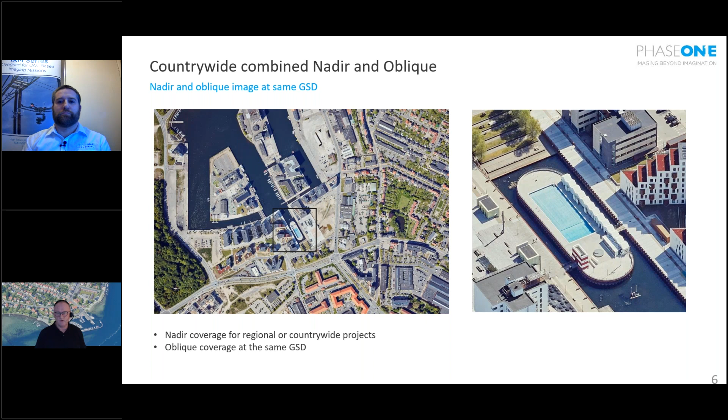At the same flight, we can go into details and get the high resolution. This example is from the full coverage of Denmark. All 45,000 square kilometers is covered with a 10 centimeter resolution, both in nadir and oblique. And we see it in several countries in Europe. It's coming, and we are sure that there will come more of this.

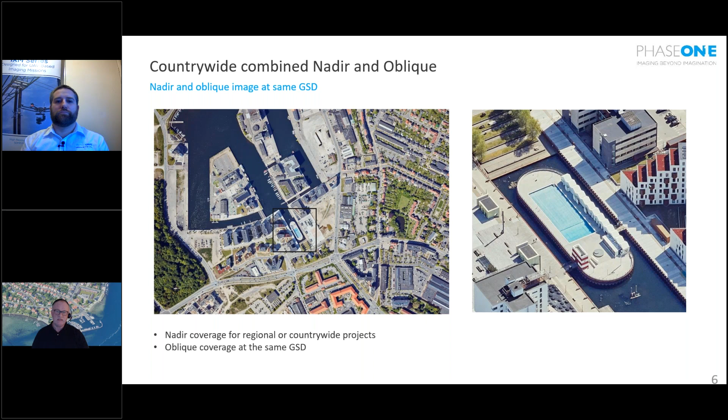So you can call it a kind of add-on for large-scale mapping, but it's not only giving advantages in the resolution. We also believe that it really can bring new dimensions to automatic mapping and feature extraction, because you simply can see all objects from all sides.

3D city models are coming. Smart city is running. Smart city has a high demand for having a kind of model where you can store all your information. They want a CAD, they want a GIS platform, and they have a high need for details.

And for this, we saw a demand to be able to fly 5 centimeter GSD. We also saw a need that it was possible to do it with any normal survey aircraft, not only flying dangerously slow, but also from a fair altitude. So with this, we really think we have made a system flexible for flying and doing this very difficult survey when we are competing with large airports around the city or in the city areas.

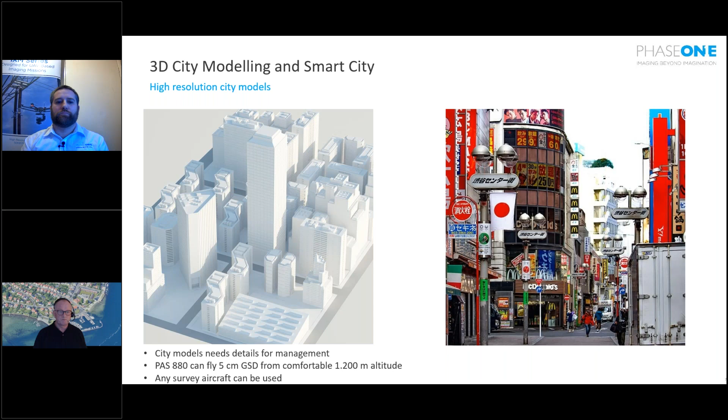Okay, so there's also a need for corridor mapping. Corridor mapping is something coming up because by photogrammetry, and this type of mapping can match the accuracy you normally have in a construction work. Typically we can now deliver the accuracy you can get by an RTK GPS. So we can fly 2.5 centimeter pixels, and with this we can support high accurate mapping projects for all kinds of corridors, whether it's supply or whatever it is.

And of course, you could do it over cities, but we mainly see the demand here. And there we can deliver this impressively. You'll get some examples at the end of the presentation.

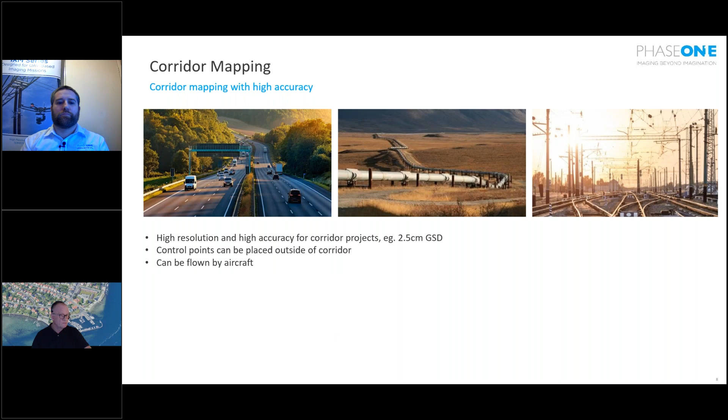And James will tell a little bit about the idea that we can check the quality online when we're flying, because fast delivery is often a key for this type of project.

Okay, so let's go to a presentation of the system, and I just need to click here.

Every day, the world is evolving. As new cities and communities are built, there's a need for advanced planning with accurate geospatial data. To answer this growing demand, Phase One introduces the PAS 880 oblique and nadir system, the new 880 megapixel large format oblique system for high resolution geospatial missions and 3D models.

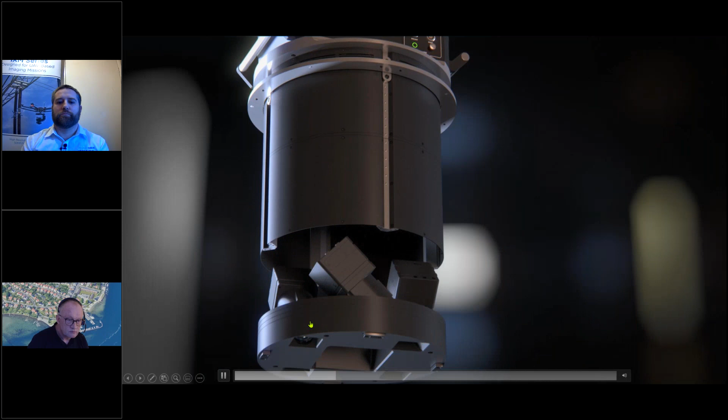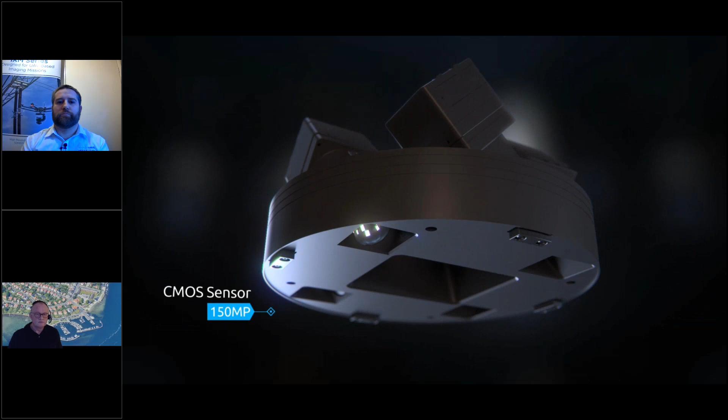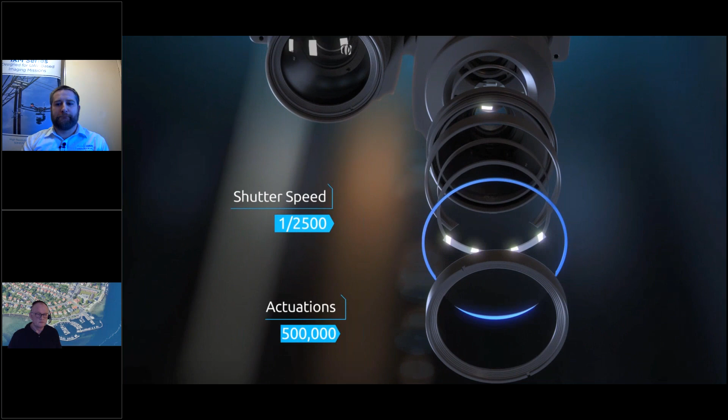The solution's flexibility enables dual configuration for collecting 3D oblique and 2D imaging. The PAS 880 is based on the established technology of 150 megapixel and 280 megapixel cameras, which comprises the backside illuminated CMOS sensor for perfect image quality. The lens's integrated RS shutter, with its long-proven reliability and high speed, delivers record-breaking actuation capacity. The unbeatable performance of the capture rate contributes to the highest accuracy and quality for effective 3D modeling projects.

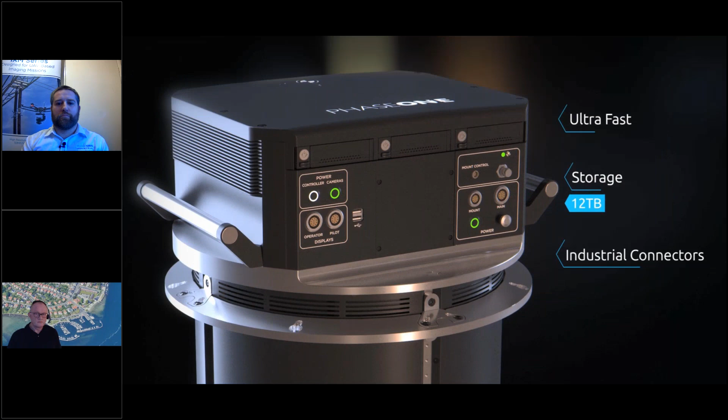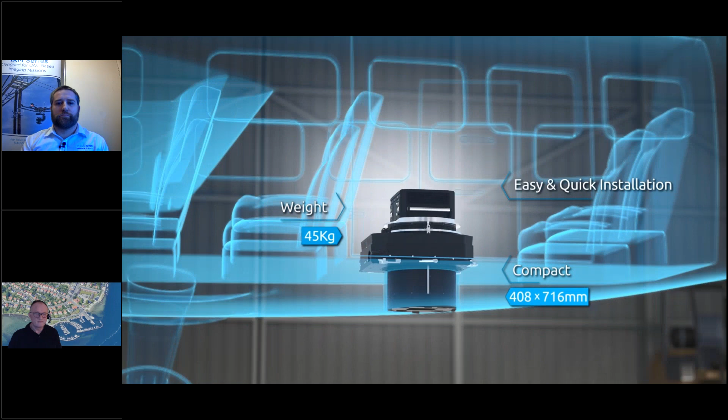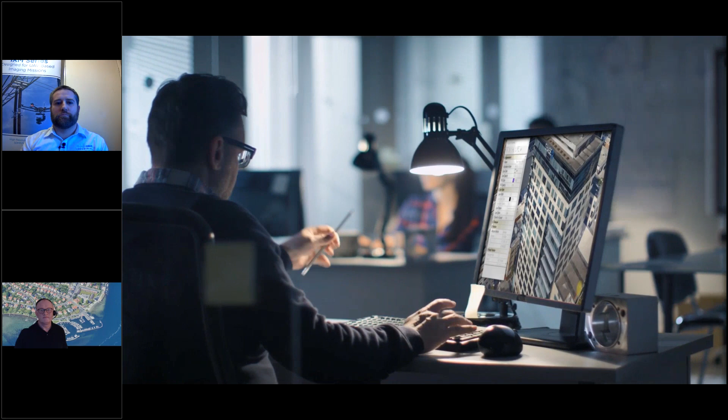Ultra-fast writing capability and large storage capacity is provided by the control unit. Thanks to its sleek design and adjustable plate, the PAS 880 is installed in minutes and fits most aircraft. With the new generation Phase One software, flight planning, data collection, and image processing are easy and efficient. Phase One designed an open system, allowing freedom to work with any leading post-processing software. The PAS 880 is developed with uncompromised quality and the best ROI for 3D and 2D imaging missions.

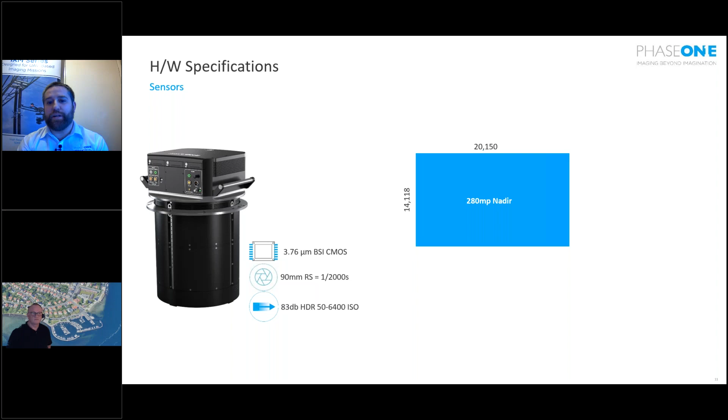For the obliques, the system is equipped with 4x 150 megapixel oblique cameras. These are all installed with landscape orientation, which gives you much better efficiency, especially in your planning for the side overlap part of the planning process. Again, the cameras use the Sony backside illuminated CMOS sensor with 3.76 micron pixel pitch. They have the 150mm RS lens, supporting exposure speeds of up to 1/2500 of a second, and again the same high dynamic range, 83 dB, supporting an ISO range of 50 to 6400.

Quite importantly, as pointed out earlier by Paul, the nadir to oblique ratio of the PAS 880 is 1 to 1.18. This is important because the closer you are to a nadir to oblique ratio of 1 to 1, the more flexible you are for planning, especially in mountainous or hilly terrain, where the GSDs are quite critical in terms of your planning for the overlaps.

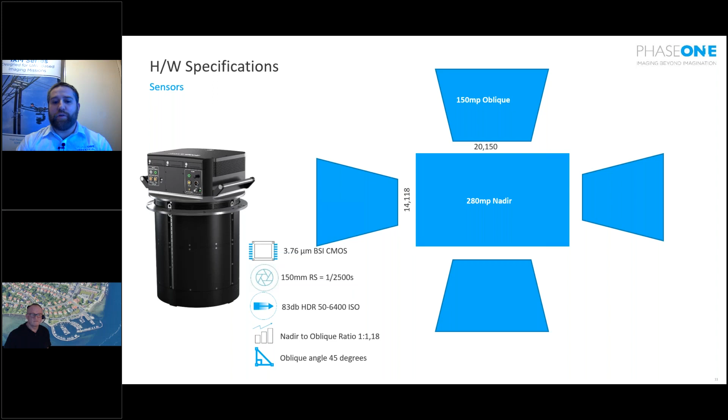The oblique angle of the system is 45-degree mounting angles for all oblique cameras. The cameras themselves are mounted in landscape orientation, so the cross-track resolution is the widest across the field of view. This supports your planning for efficiency in terms of side overlap coverage, meaning you're more efficient. The 150 megapixel cameras enjoy a cross-track resolution of 14,204 pixels, and in the along track direction, the cameras enjoy 10,652 pixels.

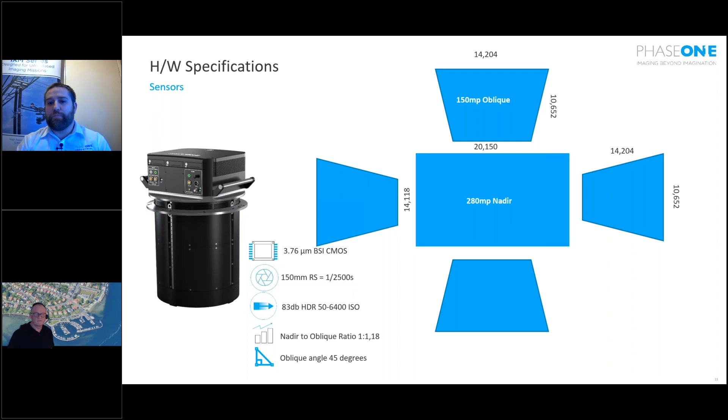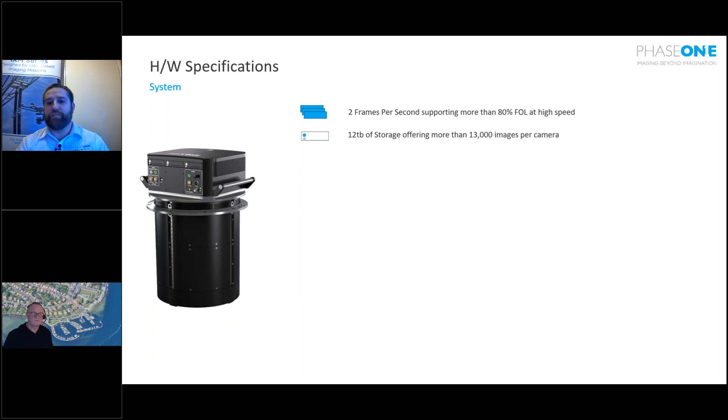So looking at more detailed system specifications: first off, as Paul mentioned, it's a high performance system, the highest performance in its class. It supports 2 frames per second, allowing more than 80% forward overlap at high speeds. The camera has more than 12 terabytes of storage, offering more than 13,000 images per camera, which allows much higher data collections per flight mission.

The system is integrated with the Applanix GNSS IMU solutions, and can be configured with either the AP+50 or AP+60 GNSS IMUs. The system has a lightweight and compact design. There's more information on weight in a further slide, but the system is only 45 kilograms, which, as a large format combined oblique system, makes the PAS 880 the lightest system available in its class.

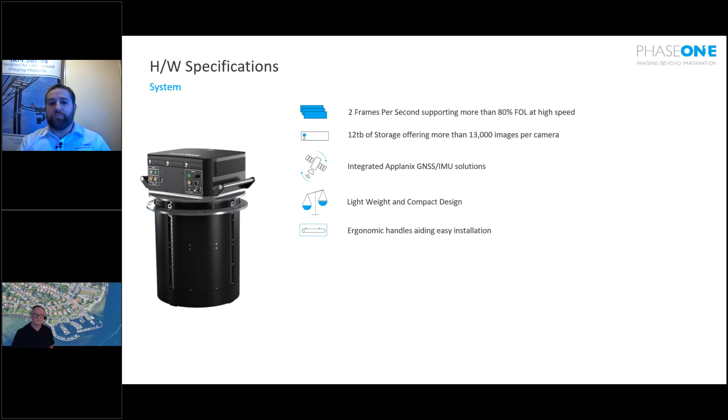It has ergonomic handles, which aid easy installation of the system into the aircraft. More information follows in a coming slide, but the main message here is that 2 people can install this into the aircraft in under 1 hour.

Coming with the next generation Phase One software package, it enables simplified flight planning, operation, and processing workflows with more advanced user interfaces and more streamlined workflows.

Power consumption is 380 watts on average, with 450 watts measured as peak power consumption.

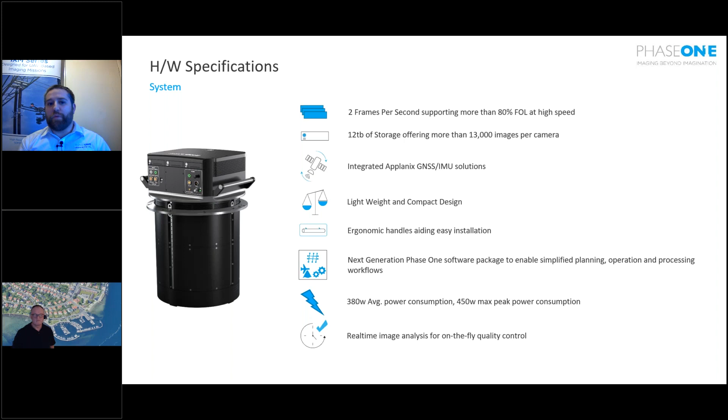On board, we also have real-time image analysis for on-the-fly quality control. So all images coming in can be analyzed in real time by the operator, which means he can make more detailed notes in his flight log, so that by the time the data reaches the processing staff, they're already aware of any artifacts, maybe cloud shadow or anything else significant in the imagery which might require a reflight.

So, forward motion compensation: we derived this by utilizing the benefits of the Phase One technology. Utilizing the high dynamic range on the sensor, along with the short durations offered by our RS shutter, allows us to minimize the motion received by the sensor. With the high dynamic range, it really allows us to increase the usage of ISO without introducing any extra noise or degradation to the quality of the image, whilst maintaining the actual physical blur received by the sensor.

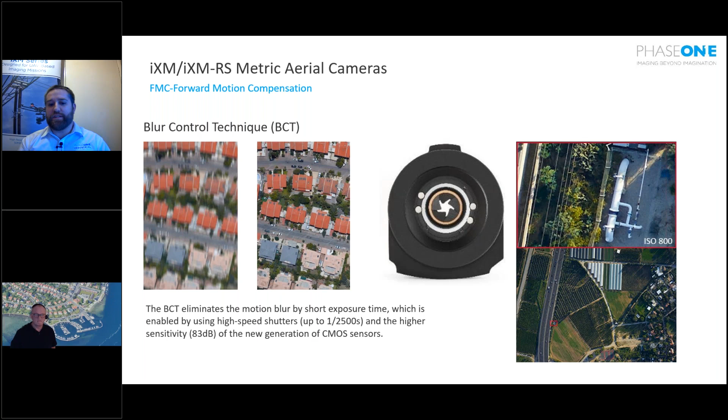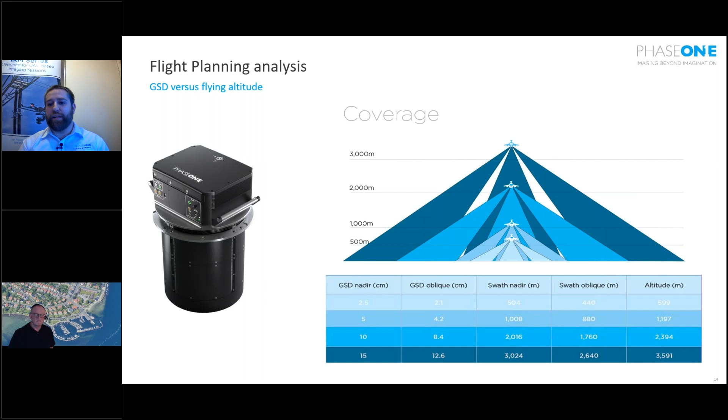As mentioned previously, power requirements are 380 watts on average and 450 watts max peak consumption, which really means you can install this in a wide variety of aircraft without worrying about the amount of power required. Everything is included inside the actual sensor head itself, so all that's required is one single power outlet from the aircraft and everything's covered.

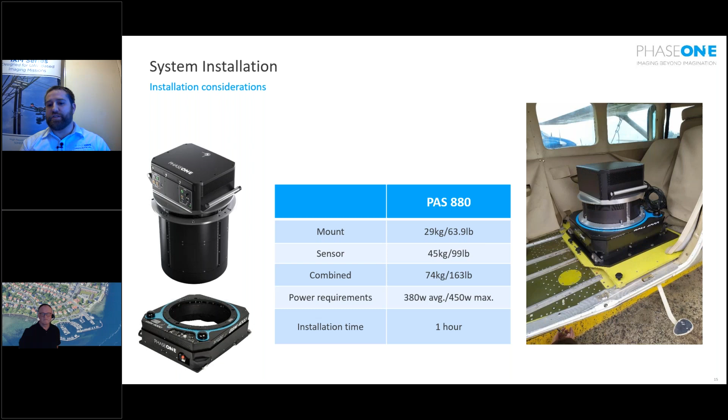With regards to installation time, if the aircraft is ready for installation, meaning the base plate and GNSS antenna are already mounted, it can take 2 people less than 1 hour to install this system. It's very flexible in case you have to quickly remove the system and install it into another aircraft for a maintenance reason. It's a straightforward and simplified installation process.

Just having a quick look over the software solution. So as the software currently stands, we have iX Plan, iX Flight, and iX Capture.

IX Plan enables the fast import of various file types, such as digital terrain models, DTMs from direct download from SRTM, GeoTIFF import, XYZ import, base maps, and area of interest, supporting all common formats like DXF, shape, KML, DWG. It allows you to quickly modify and update project shapes, and import ground control points for detailed planning.

On top of the flight planning, we also have various reporting tools. We can report on project parameters, and we can look at various quality control tools to ensure that the planning is really conducted to the standards required by the client.

In the aircraft, we have, first of all, the iX Flight. The iX Flight software enables the planning and execution of the flight, the positioning, sensor management and triggering.

It also collects in the background log files, which can be used to enable more detailed processing, flight reports, and greater mission analysis. On top of this, the system is delivered already with two displays: a 7-inch display which can be mounted to the yoke of the aircraft for the pilot, and a 20-inch display for the operator, giving the operator the largest display to really view each image in great detail and make sure that the details collected are to customer specification.

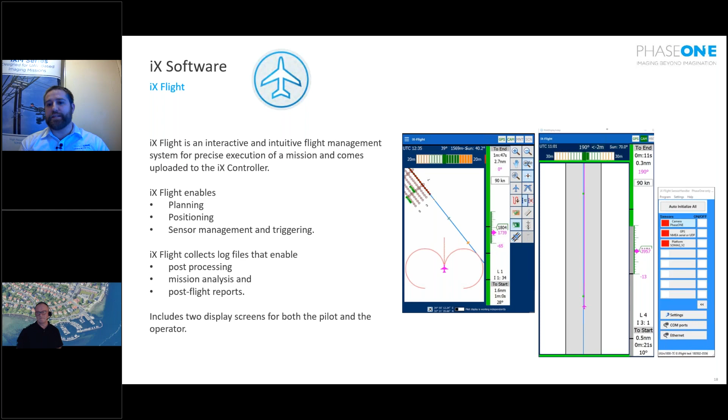Currently, alongside the iX Flight, we also have the iX Capture software. The iX Capture is the camera control software, which is really where the operator is able to fine-tune the camera settings to ensure optimal image quality.

This is done through histogram feedback, which is received for each individual image, along with the EV exposure balance. So you can really see image by image that the settings applied to the camera are the settings required to generate the best image quality possible.

On top of this, whenever you need to change an image exposure setting or aperture value, this is applied immediately to the very next flight frame in the sequence. There is no delay in the update of the settings. It has happened, so you can respond very quickly to changing conditions and adapt the system accordingly.

As well as being used for image capture, this software is also used back in the office for post-processing. Taking that image data along with the calibration information from the calibration report, you can convert the raw file quickly and easily to a distortion-free calibrated TIFF, which is then ready for your follow-on post-processing solution.

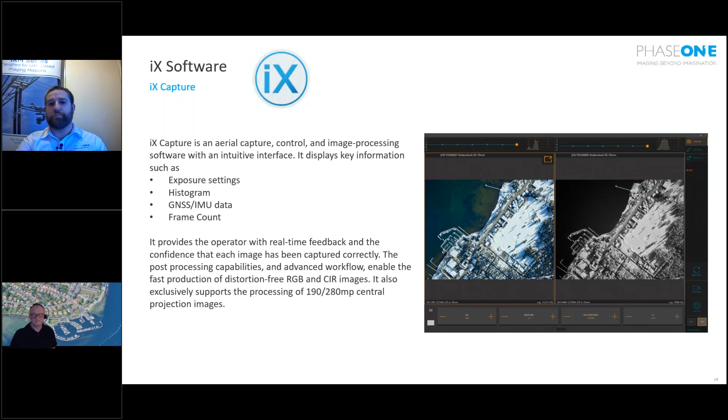So a quick look to the future. In development currently is the iX Suite package, which includes updated iX Plan, updated iX Flight Pro, and also iX Process. First of all, looking at iX Plan.

It's based on the existing application. It brings forward the addition of oblique-specific planning, the ability to input oblique system information, and therefore plan the oblique mission. The long-term plan is to remove the current area limitation and also change the software so that instead of just creating individual flight plans, you're now creating projects, including missions, making project management much more streamlined and user-friendly. That will be done through an advanced user interface.

We then have the iX Flight Pro. This is a new product. It combines into one single software solution the flight management and the camera management into one product. It will be done through an advanced pilot display with the addition of symbols and functionality, as well as an advanced operator GUI.

It will allow the operator in real time to physically monitor each image coming in. They can go back and review an image, giving the operator the ability to really do quality control in flight. Utilizing those periods between flight projects, or on the flight back to the base of operations, gives the operator the chance to go back through some of the images and make notes in his flight log, so that during the delivery of the data back to the office, that can also be combined with the post-flight reports.

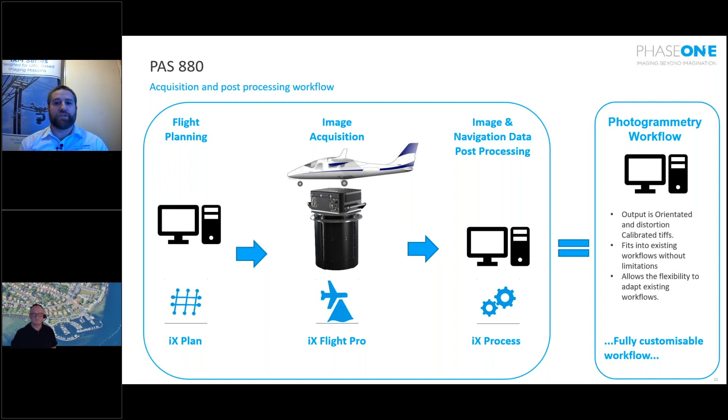What we're trying to say here is it's a fully customizable workflow. We're not trying to limit you in where you can work. We allow our customers to be the experts on exactly what software packages they choose to use.

So PAS 880, what is included in the delivery? Well, of course, we have the system pod and control unit, coming with 12 terabytes of storage. Eventually we'll have the iX Suite software package containing a license for iX Plan, iX Flight, and iX Process. There will also be a 7-inch pilot display and a 20-inch operator display.

Depending on the customer requirement in terms of accuracy, we would deliver the system with the integrated Applanix AP50 or the AP60, which will come with either the Type 91 or Type 57 IMU. This will also be delivered with a license of the POSPac MMS and POSPac Photo Tools software.

The system comes fully calibrated, so calibration is already taken care of by Phase One in the lab. We also offer on-site installation and system operator training. This includes installation of the system into the aircraft, operation of the system both on the ground and in the aircraft, and full software package training.

The system also comes with a 1-year complete system warranty, including system firmware upgrades and software maintenance. Optional extras include extended warranty packages, extended training packages, and also coming for the future, an optional near-infrared channel.